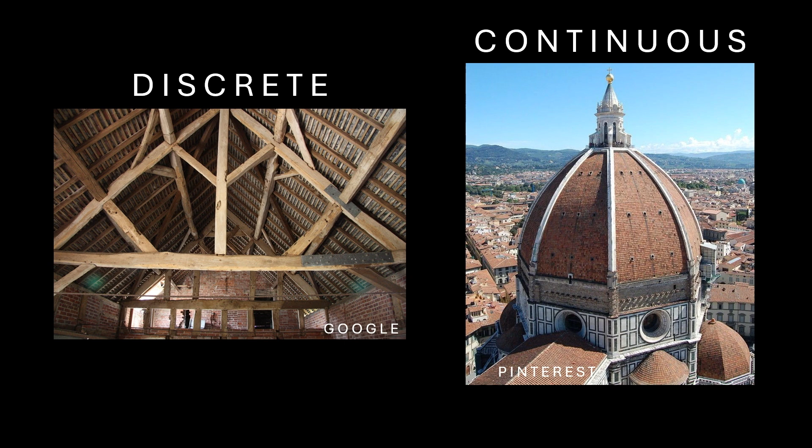Even terrestrial structures are built with material economy in mind, because material and labor is time and money. Over the centuries, 2 forms of architectural layout, structural form if you like, have emerged that make use of material economy.

On the left, we have discrete layouts: slender bars, beams, and rods connected at discrete joints to create these triangulated forms. But equally efficient, on the right, we have this continuous dome roof of the Santa Maria Cathedral in Florence.

So it's a surface, if you like, and if you take a few roof tiles off and poke through that surface, you'll find it's quite thin. So it is very efficient, and it operates like a shell from nature.

Engineers build structures that are safe by following these codified regulations of good practice. Now, for those in the audience that perhaps aren't familiar with the terms, engineering structures are made of elastic materials, so they stretch and compress under loading.

The resistance to that loading is met by the stiffness of the structure, a bit like a spring, and the stiffer the structure, the less it deflects, and so on. I should say that deflection, displacement, shape change, movement, distortion, these are all synonymous terms, if you like.

So the 3 criteria that engineers work to is that the stiffness, whilst bearing material economy in mind, should be such that the largest changes in shape are less than 0.3% of the size of the structure. The strength of the material from which it is made is not compromised, and everything that it does is predictable. It doesn't go unstable. It's giving us a response that is certain.

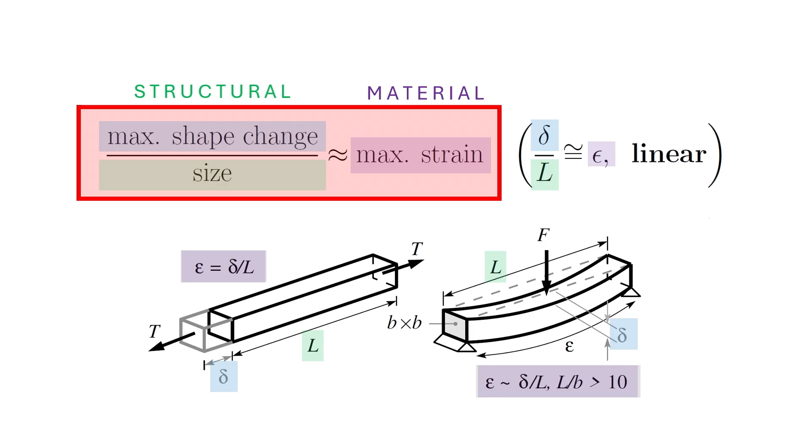But on the right there, the beam that's bending through a central point load deflects by an amount delta in the middle, but that divided by the span gives you a strain that's also delta over L, but indirectly through the assumption that the length to depth ratio, this L over B term, is greater than 10.

But nevertheless, engineers sometimes get this wrong, particularly when you have a sort of new architecture in play, and the Millennium Bridge opened in June 2000, and all rather publicly it had on show this sort of flaw in its design where the lateral, the side-to-side stiffness was too small.

It would wobble from left to right, and many thought this was a publicity stunt to garner media attention on the day. But really that wobble fed into the mindset of the people walking across the bridge. It literally synchronized their steps, and they all began to compensate together.

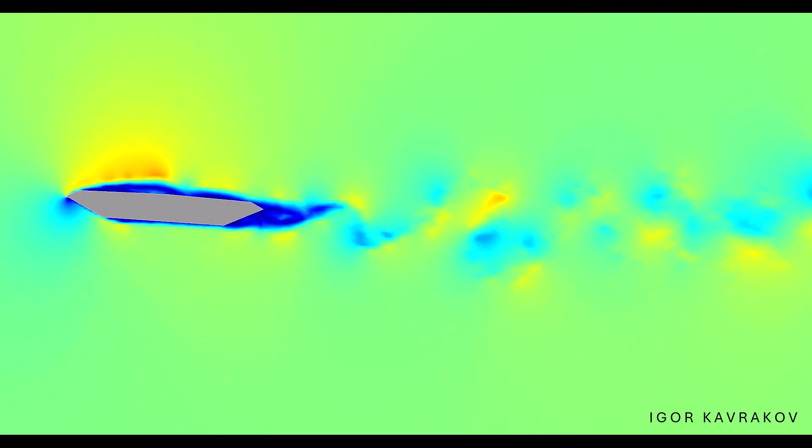This is a cross-section through the bridge, and there's a flow coming from left to right. The bridge is wobbling, we're not getting rid of it, and you'll see it generates this oscillation in the flow behind it. These vortices kind of spool off the bridge, pull the bridge down, they kick against it, and the bridge springs back.

But this introduces at the front, where the air is hitting it, this greater sort of disturbance. You'll see the orange flow, if you like, then beginning to feed into the vortices at the back, making them bigger, making the kick larger, and then suddenly this begins to run away, and it's sort of end of days for the bridge shortly after that.

So structures change shape. They move. We build them to be relatively lightweight. We accept that they move. We try to contain that movement. But I've made a career in research terms out of making structures deliberately change shape, what we call shape-changing structures.

I've got to be careful here about expressing loyalties because my civil engineering boss is in the audience, but my first love is really aerospace structures, the structural mechanics, if you like, of aircraft, spacecraft, satellites, that sort of thing.

So I used to go to conferences where the great and the good would stand up saying, if we're going to build these aircraft of tomorrow, we have to have structural mechanics that allows the shape of the wing to mimic what you see a bird doing in biology, where the wing will change shape to adapt to the aerodynamic flow. So it can sprint, for example, quickly to a scene of interest, or it comes into land on a much shorter runway than expected.

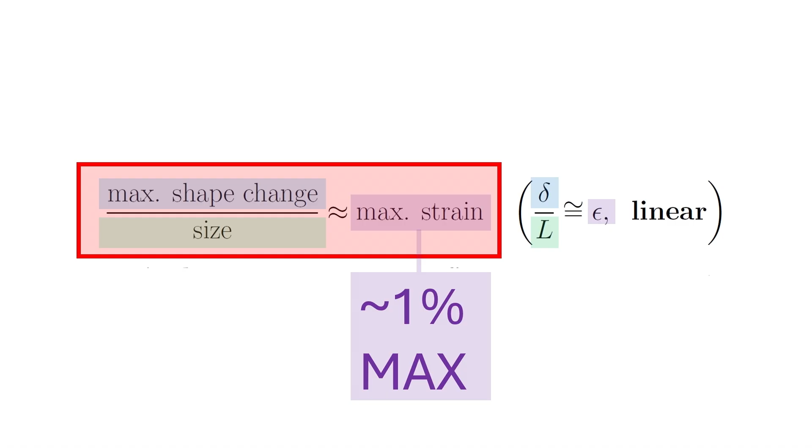But I'll remind you that if we even allow engineering materials to have a little bit more strain, you're not getting close to the limits of ostensible shape change that will allow that. But if you look around you, there are examples of shape-changing structures there.

And that enables it to be folded with many others, so you can launch them into space at the same time. And then they gather themselves into a little swarm and spin around the Earth once they've deployed, beaming solar energy back to the Earth.

This is a project led by Sergio Pellegrino at Caltech. He was formerly here in Cambridge and my PhD supervisor. In the mid to late 90s, during my PhD, I worked on a primitive form of this self-deploying technology.

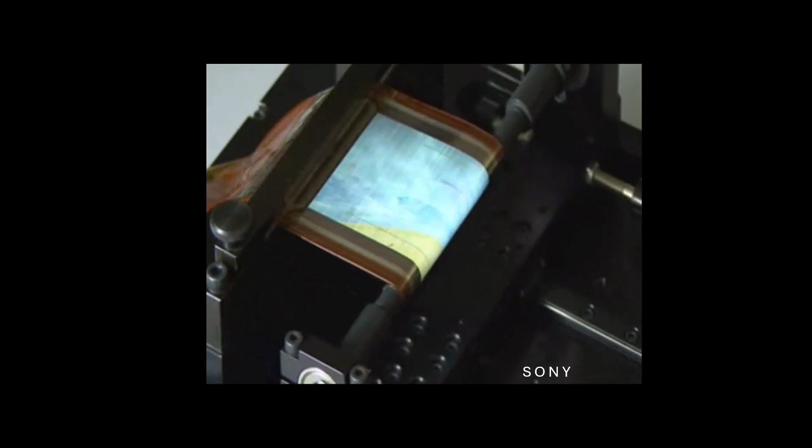Sony, in marketing the flexibility of their OLED display some years ago, were keen to show that it was so flexible you could roll it around this motorized tube.

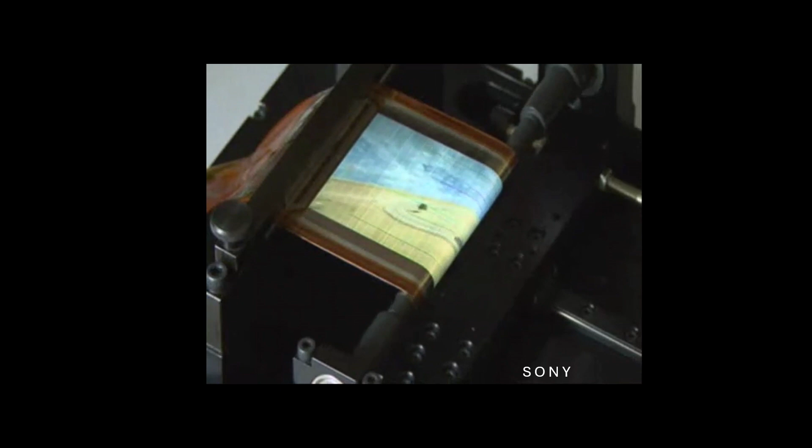But if you look around you, there's technology in the home that can be deployable. Deployable because you want to store it in a folded, compact way, but you have to open it, and in opening it, you latch it, you lock it to give it some kind of structural integrity.

So I'm entering the last phase of my academic career, and I thought, well, perhaps I have enough experience and wisdom to put this stuff down on paper in terms of writing a textbook. It's a book literally of two halves: the geometry and mechanics of the possibilities of shape change versus what you need by way of structural mechanics to make that happen.

And I'm going to talk about some of these principles now with a little bit of demonstration.

I think it's important that we write textbooks. We've lost, if you like, that ritual and custom, I think, because of the way in which research has become commercialized. Maybe I'm platforming slightly, but I think it's incumbent upon us to educate the next generation, and to do that, you should be writing textbooks. I'm aiming that message at any mid-career academics in the audience.

So let's talk about compliance. Now, compliance literally means you've got something which is already flexible. What can you do by way of shaping that? In this case, I'm going to talk about surfaces and the shaping of surfaces via generators.

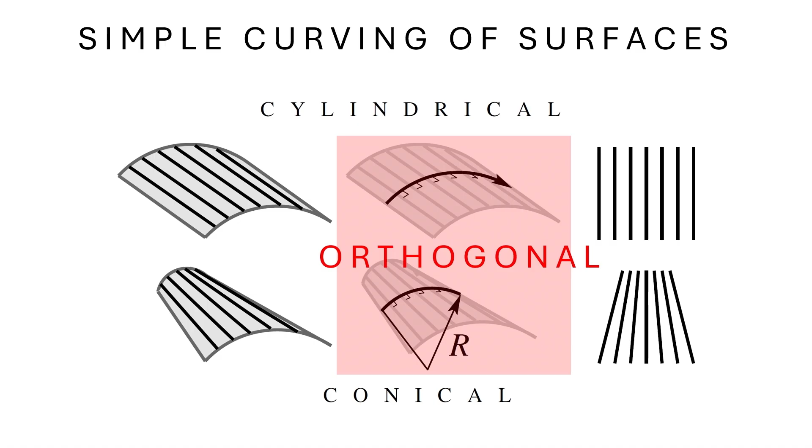The trusty engineer's piece of cardboard clearly tells you you've got a flexible surface here. What I mean is that if you have a surface which can be curved, you can either curve it about a cylinder or curve it about something which tapers like a cone, to create these surfaces upon which you can draw straight lines. Those straight lines run at right angles to the direction of curving. Because you can draw these straight lines, you've got what's called simple curvature, or simply curved surfaces.

James Clerk Maxwell suggested the projection of those lines onto the plane of a page in order to generate an impression of the surface, which is why these lines are called generators.

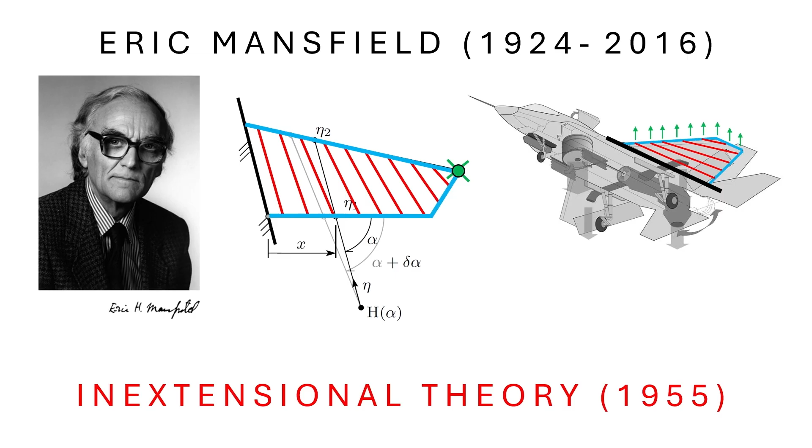Eric Mansfield, working at the Royal Aircraft Establishment for 30-odd years, took it a step further and said that out of the infinitely many generators you can draw on the surface of the thin wing of a fast jet, only one of them will exactly satisfy the work balance of the aerodynamic forces causing that curving out of plane to the energy stored within the bent wing - what he calls an inextensional theory, inextensional because the material is curving, it's not stretching.

But an effect that is perhaps felt up and down the country most weekends with regard to the flexibility of surfaces is what I call the pizza effect. The pizza is like a thin surface that droops, and you can draw some straight line generators on this. But we all know that with pizza, if you curve the base, you can straighten the pizza.

So then you can eat the pizza with a little bit more dignity. Here's a little demo with something a bit more handleable in terms of size. The generators are orienting themselves at right angles to this radius of curving that you see there. So that was the demo.

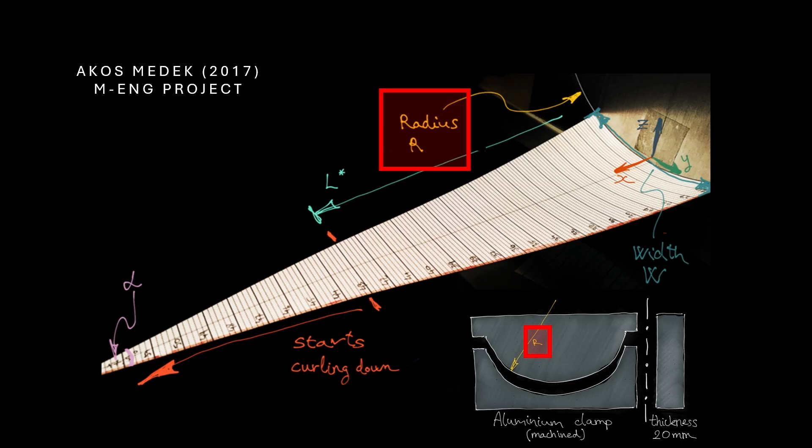We did a project with an undergraduate, Akos Medek, where we tried to understand the relationship between the triangularity of the slice and the radius of curving at the base. No matter what you did, you always got the end of the pizza drooping a little bit when you do this properly. You can see this here when I kick it out and let it go a bit - the front droops a little, but this is a property in proper experiments.

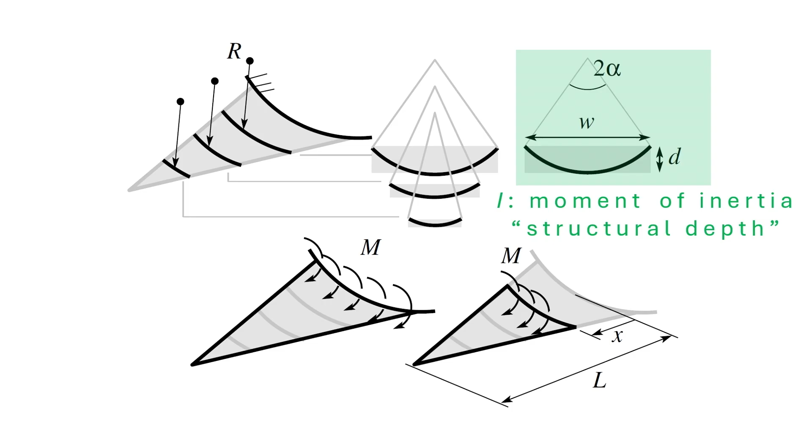Now the reason for that is if you assume your pizza is simply curved, then every cross-section moving towards the tip is a circular arc of diminishing width and depth. That depth provides the moment of inertia to create structural depth, which helps you carry the leveraged weight ahead of that cross-section, which generates this reactive torque, which we call a bending moment, M. It too diminishes as well.

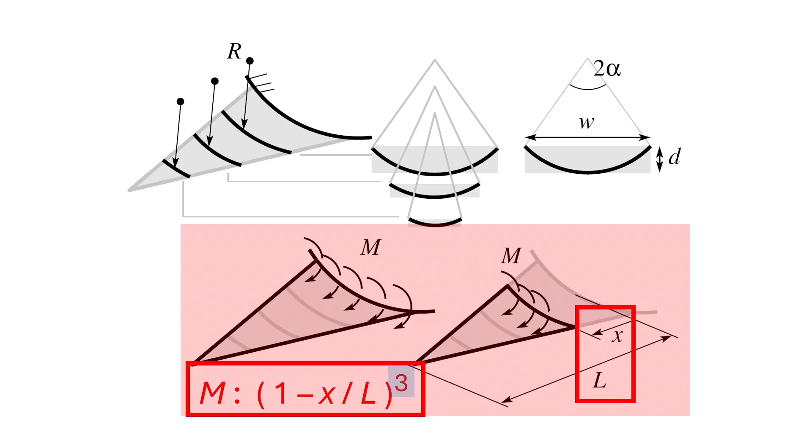So there's a lot to take in there. But the point is, if you plot those variations normalized between the base at 0 and 1 at the tip, you see that I sort of goes off at a faster rate and almost disappears two-thirds of the way along. If you plot the ratio of M to I - what you need to carry relative to what's available by way of structural depth - you'll see it blows up again towards the end, two-thirds of the way along, which is kind of what we're seeing. So if your structure isn't able to furnish that demand, you'll see it dip at the front there. Okay, so that's compliance.

I'm going to talk about mechanism here with the tagline, articulating catastrophe. These are scissoring units where you have bars, pairs of bars connected in the middle and to each other, so that when you articulate them they go in this sort of linear motion - we're kind of familiar with this. This allows you to change the position between, say, a mirror and a receiver on a satellite, or to reach inaccessible heights using these scissor lifts.

Sergio Pellegrino, again at Caltech, recognized - and this is the catastrophe part - that these structures aren't really structures, they have no stiffness, they're quite floppy. But if you were to weave cables through the structure, you can arrange for those cables to become exactly straight as you deploy it. So the tension in the cable acts to provide stiffness, if you like, by proxy.

If you move the position of the central pin so it's no longer central, like we have here, and articulate it, it goes in a curved path, as you can see - a more tightly arranged curved path. That's quite useful, but a better arrangement is to use a scissoring pair connected in the middle, but with a kink. The kink creates a divergence between the outside pins, and rather unusually, that angle remains fixed irrespective of the articulation angle.

So you get these little units sliding up and down these triangular channels. And if that channel is exactly one whole fraction of 360 degrees, you can connect them to form a ring, and so you produce something which is a little bit more useful.

If I switch to the screen, can I just switch to the overhead here? I didn't see it on screen there. So just to show that.

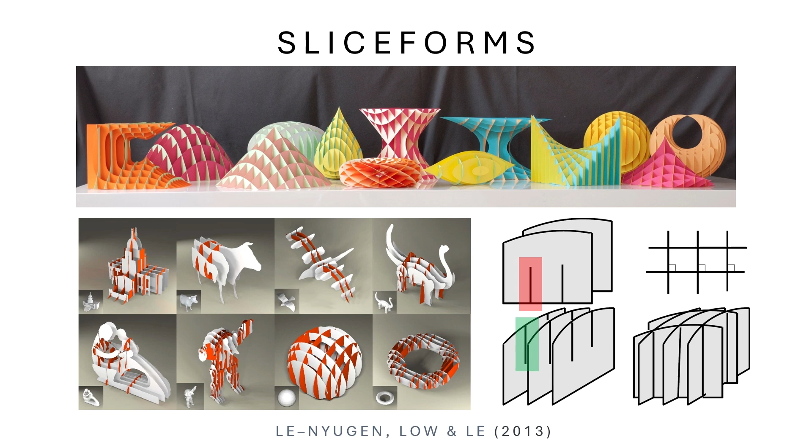I'm going to digress slightly and talk about this arts and crafts pursuit entitled slice forms. This is where you create volumetric shapes by taking slices through the original volume at right angles to each other. This creates slices with a profile on the outside, and with the complementary slots, you can reform them to produce a discrete version of the original volume. This is why they're called slice forms.

You don't have to have slices that are vertical or at right angles to each other. In this rendition of a torus, where the slices pass through the center, it generates a circular profile in the slices, known as a Villarceau circle, named for the French geometer who discovered it.

So I have one here, and you can see it's quite a lightweight structure. It's got a lot of air, it's made of card, and it's quite stiff. We were interested in their structural mechanics, their load-bearing capability.

It's this almost three-dimensional volumetric version of a pantograph, with scissoring planes and hinge lines. What's beautiful is that they fold into a flat stack. They can be opened as far as the design configuration allows. This one is deliberately helical, so the ends never meet, but it locks out - you can't move it past this final lockout position without some jamming taking place in the structure.

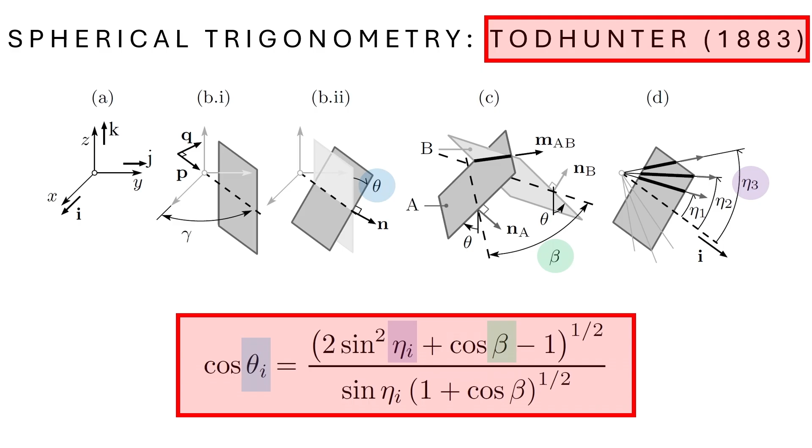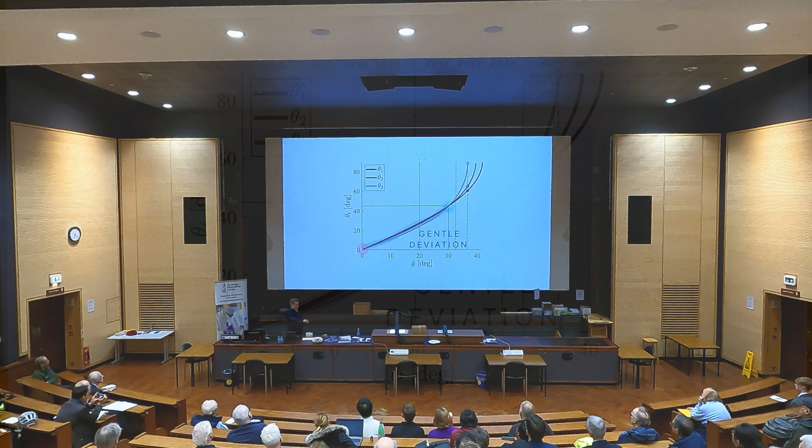relative to the opening angle beta, depends on where the radial slot is - this eta term you're seeing here. So theta, as you move along the slice, and the white dots mark different slot positions, will vary. When you plot that variation against the opening angle, you find that in the flat folded configuration and the open configuration they're exactly the same, but they gently deviate in between - meaning that as you open these, the slices individually are gently rotating within themselves.

They're flexing and curving ever so slightly, and when you get past the design configuration into the lockout phase, you can see the angles ramp up exponentially. It begins to jam, which explains what's going on.

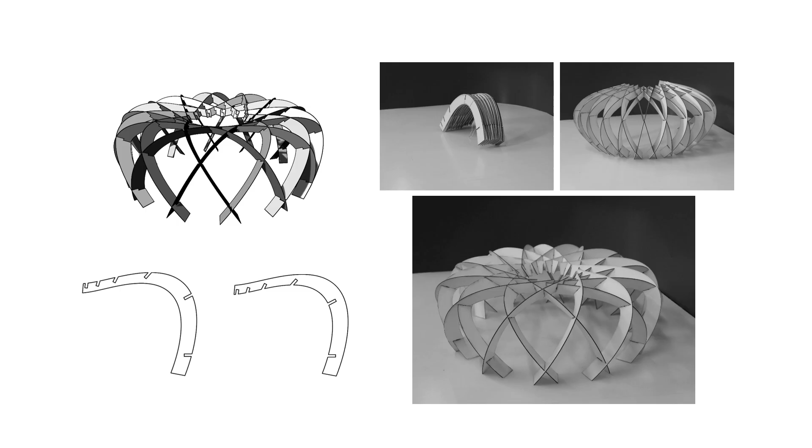Not to diss software - you can use it to do interesting things like create slivers instead of slices, arranging birdcage-like forms, and even an asymmetrical, artist's interpretation of the Beijing Stadium.

But that's the end of that, and now we're going to move on to folding, which involves forming vertices out of plane.

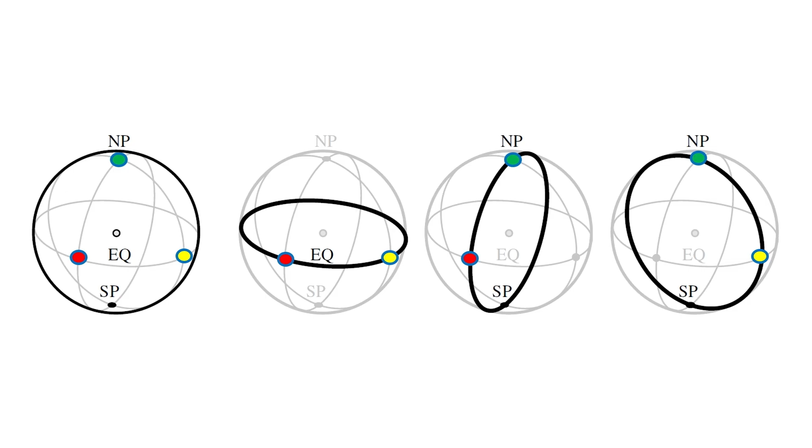Hold that thought. Here's a sphere with some circles drawn on the surface. These are great circles because they have the same center point as the sphere. We have an equatorial or an equator circle. And then we have two polar circles on the right, separated from each other by 90 degrees. That allows us to identify 3 points in the circle where pairs of points are common to pairs of circles.

And if we then go on a journey, if we walk from the North Pole to the equator and get to that point at the red, and then proceed to the yellow, we have to turn through 90 degrees, and we get to the yellow to get back to the North Pole, we have to turn through 90 degrees as well. So we create a three-sided object on a sphere, a spherical triangle, where clearly the internal angles in this case are 90 degrees.

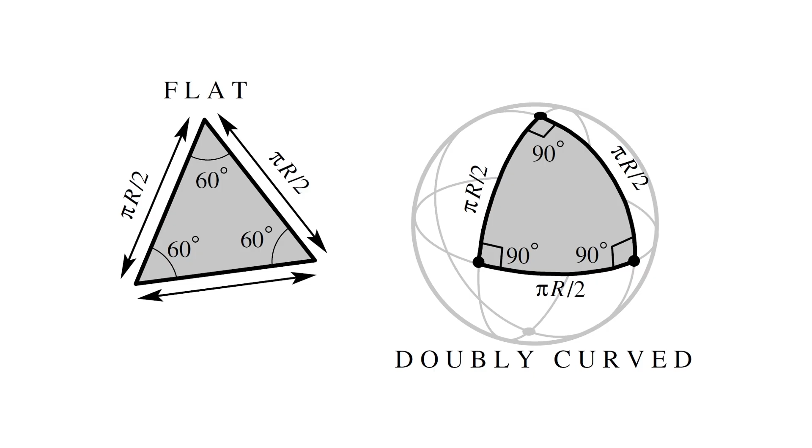And so if you take a flat surface, a flat triangle here, and the side lengths being pi over 2 are coincidental because it can exactly fit onto the surface along its edges, but everywhere else, with respect to what's happening in the corners, you will see the corners have to expand from 60 to 90 degrees. The material has to stretch, and that stretching is a consequence of the fact that you're forcing something flat to become doubly curved, and that was all due to Carl Friedrich Gauss's remarkable theorem.

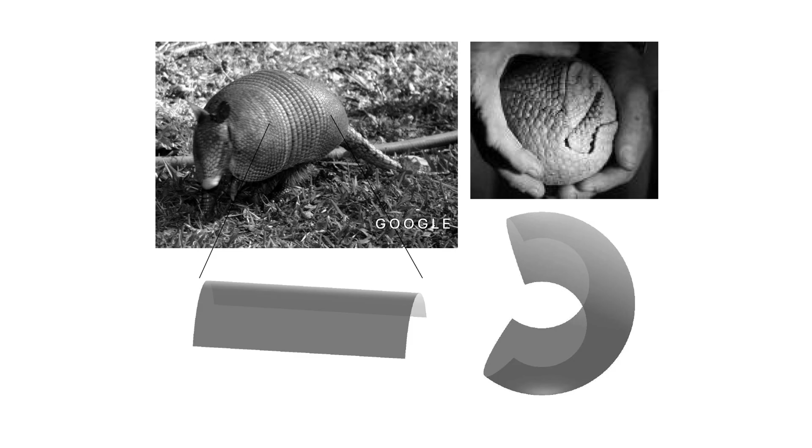But the armadillo is a friend of Gauss because it has this semi-cylindrical sort of midriff. It's got this armored body, and this midriff allows it to be articulated into a ball. So it goes from being simply curved in the middle to something which is doubly curved, so it must respect Gauss's theorem as well. This is a schematic of what happens. It's got more or less a sort of fixed front and rear, and this flexible middle.

Well, the sort of central portion comprises these pleats, these ridges for sort of armor protection, but the pleats can open and close. And even in this simple rendition here, where I force the center of the pleats to lengthen and to shorten at the edges, you can see already the impression of a spherical surface on the right side emerging.

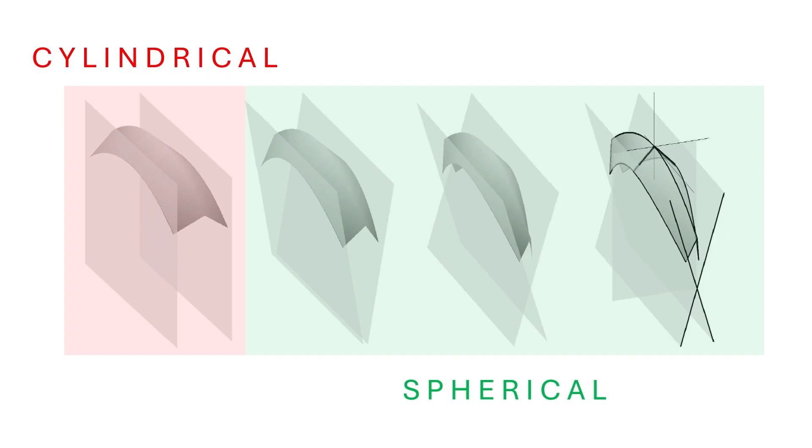If you take a single pleat and imagine it in its cylindrical configuration sitting between two parallel planes, and then you rotate those planes to create the sort of spherical journey, then moving from the opening in the middle to the outside, closing, you get the material. The material has to stretch. There has to be some compliance of the material to match that articulation, which kind of lends this then to a sort of family of structures that we call compliant shell mechanisms.

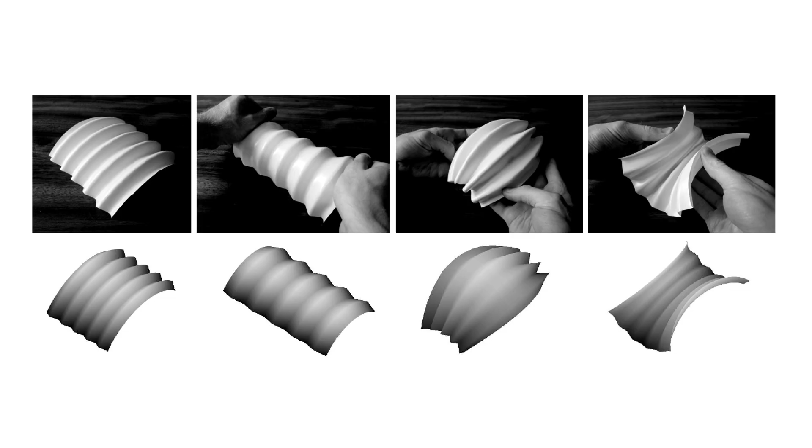And so you can propose some simple demonstrations of this. You can compare then against simulations, and you can simulate then the folding of an armadillo if you so wish. This is important, this relationship between double curving and the material stretching, because if you don't take account of that during engineering design, then things like your tubular Hoover hose becoming doubly curved will experience stretching that might be unwanted by the material and thus lead it to failing prematurely. You also see this principle in things like bendy straws.

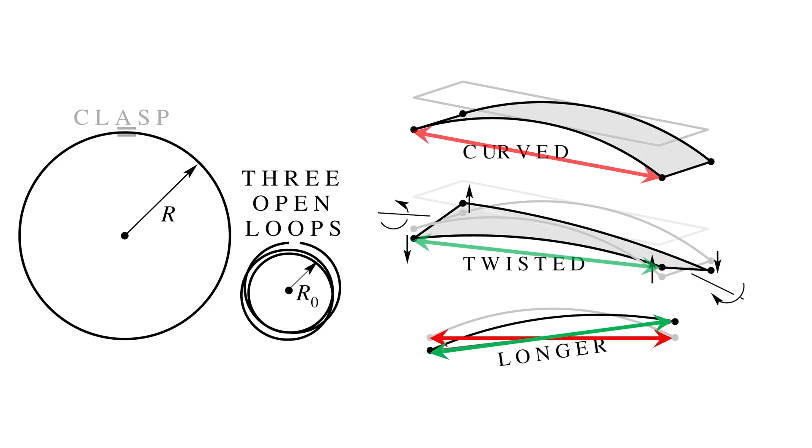And I've got an example here of a hoop, not a very circular hoop that you can see. There's a clasp at the top here where my hand is to keep the loop open. If I remove that clasp, it collapses into three smaller loops that you can see there. Here, the buckling interchange or transition is not between curving and compression, but rather between curving and twisting. Because if you look at that little curved strip there and the difference in the length of the red and green lines, if you twist something which is already curved, you gently uncurve it whilst adding some twisting to that. So there's an interplay there, and if twisting wins, then it follows that path.

So I'm going to shake this, and you see it's quite impervious to any sort of movement. I'm doing this all in plane, but if I twist my hand, then after a point, it jumps into three loops, and that's very, very nice indeed. I'm working with the great Basile Audoly in Paris. We took it a step further, where if I formalize what I've done there, I'm twisting this in a singly directed fluid movement. I can create the same sort of thing.

But if I introduce some variation into that twisting movement, which is to say I kind of turn my hands one way or go the other way, I allow that to take place, then I can create five loops, okay? And if you know what you're doing, you can make seven, okay? But it's not very stable. Well, it might jump up and give us something to laugh about in a moment.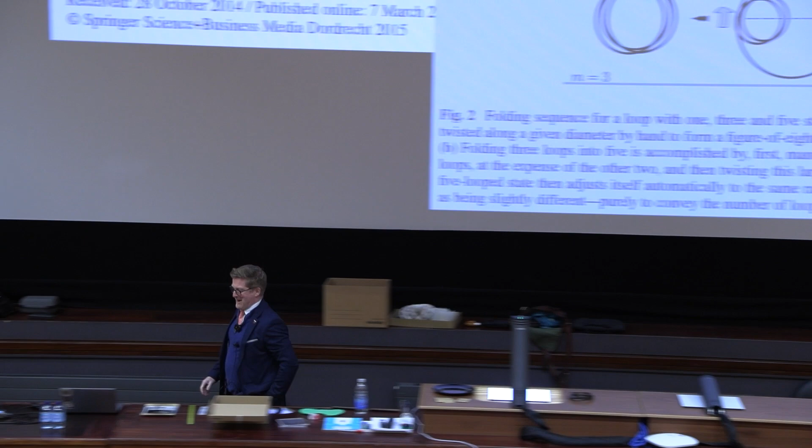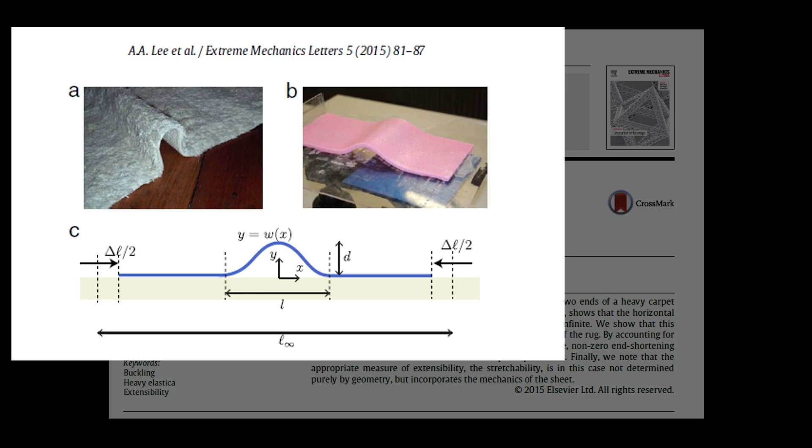But anyway, Dominic Vella's group at Oxford looks at buckling in a slightly different way. They talk about this problem, the birth of a ruck in a rug, which is to say you have an Euler beam lying on a surface, and instead of the whole thing buckling sideways, you get this localized hump in the middle. This is what they call the ruck. And you see a ruck also forming when this ring of cells, the epithelium, spontaneously folds.

The epithelium folds inside to create this internal structure that repeats along the length of the developing embryo to set the body plan for things like the digestive system and so on, in a process known as gastrulation. It's a buckling process because what's happening is that the ring of cells wants to be larger. They're proliferating, they're getting much bigger, but it's contained within the shell.

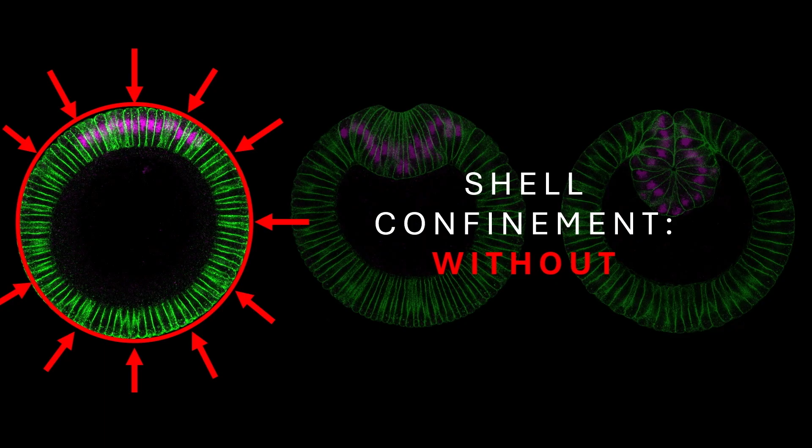So this is the formation of a ruck through buckling. We call it ruckling. It's happening within a cylinder, within a ring, so we call it cylindrical ruckling. And it's important to note that that ruck just doesn't grow from nothing. It appears at a finite angle here, and we call that angle 2 theta min. And the corresponding growth strain at which that takes place, you can imagine to be the excess angle above 360 if you were to cut that ring and it was just to grow and overlap instead.

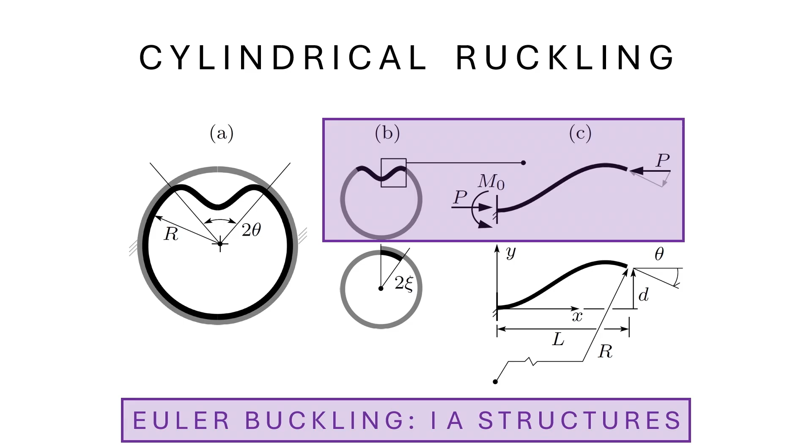So I looked at this problem as a mechanics problem that we can solve with the techniques that we teach our first-year engineering students. So we don't use calculus of variations. We solve for the equilibrium of that. We think about how that sits within the shell in terms of the geometry. And when you solve for the instance of ruckling, you get two formulas that are largely constants, except for this K term. This K measures the thickness of the ring to the radius of the ring that's deforming. And you'll see they differ in terms of the power to which they are raised.

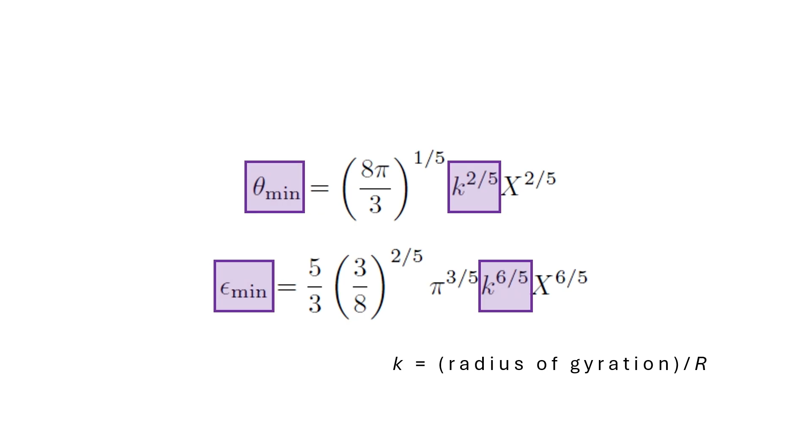And this is important because developmental biology groups around the world attempt to calculate these angles. They measure it from experiments. They measure the height at the moment of inception of the ruck itself. And the reason for doing that is so you can find the level of growth strain that's taken place there as well. And so they plot lots of different results from different experiments. They do simulations using software.

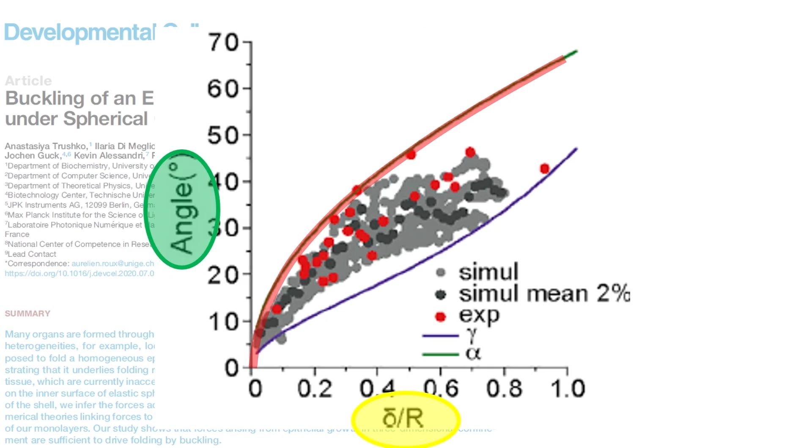And the red line that you see there is a calculus of variations model that contains a Lagrangian multiplier to account for the shell-containing constraint. It uses a hyperelastic biological material with large strains and large displacements enabled. And it's got a bifurcation algorithm to capture the buckling instance. So that's all very well and nice. If you plot my results, you follow that red line almost perfectly. So we have a mechanically transparent way of doing things. And the reason it works is because the process is remarkably simple, because that's kind of what biology does. It finds the simplest way to do things.

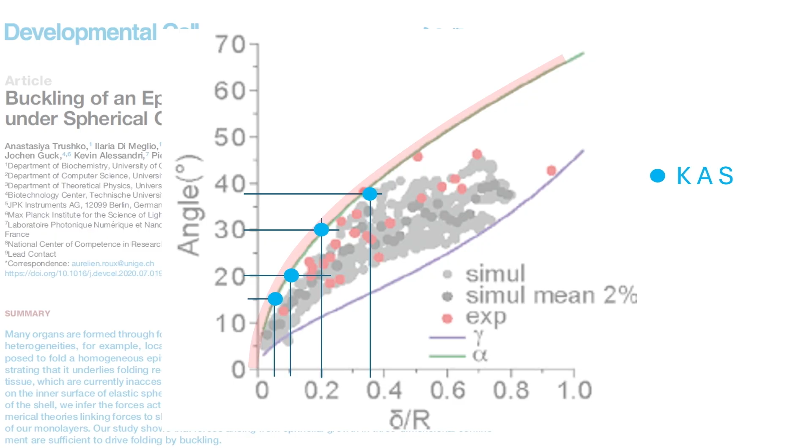William Shakespeare, 110 years before Euler was born, wrote, "And as the wretch whose fever-weakened joints, like strengthless hinges, buckle under life," a metaphor for the midlife man, perhaps. But William Shakespeare was not a civil engineer. But you can see the proliferation of technical terms here that we now use within the vernacular for describing our subject: hinges, strengthless, buckle, and joints. I think that's all rather lovely, to assert that kind of cultural relevance.

Buckling is derived from the French boucler, which means to bulge, which is derived from the Latin for cheek, where we get terms like buccal fat from. But I think, if our cheeks are bulging, we shouldn't be lamenting the failure of our structures through buckling. We should be smiling, not celebrating the failure, but celebrating the fact that buckling features right at the heart of life itself.

Okay, so the next principle is non-linearity, going beyond shallow. What I have here is a thought experiment. I've got two rods that are connected to each other by pin joints. They start off being length L each. They sit a little rise H above the horizontal, and the center point is pushed vertically, so they compress.

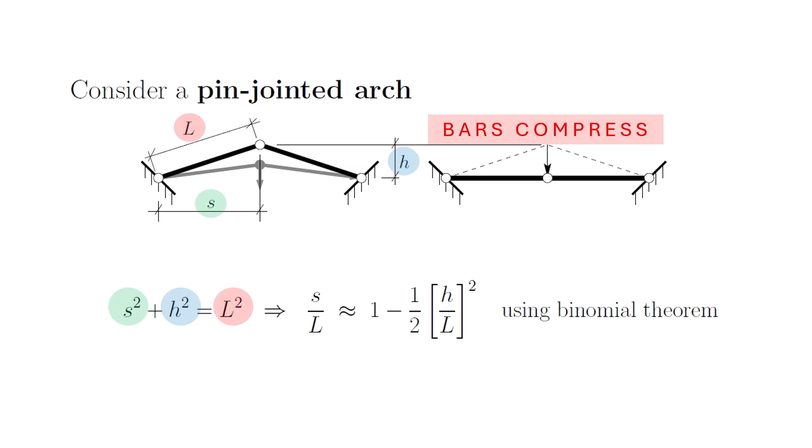So the S is shorter than the L, and you can write a little bit of Pythagoras. You can truncate that series using the binomial theorem. You can calculate the strain, and you find that that strain varies as H over L to the power of 2. It is not linearly proportional, but non-linearly proportional.

If you set the limit of strain, say, equal to what you see in engineering materials, around 0.2%, then the allowable H relative to L that permits that to take place so that you don't exceed the strain is about 6.3%. Compared to the linear result, that's a 30-fold increase.

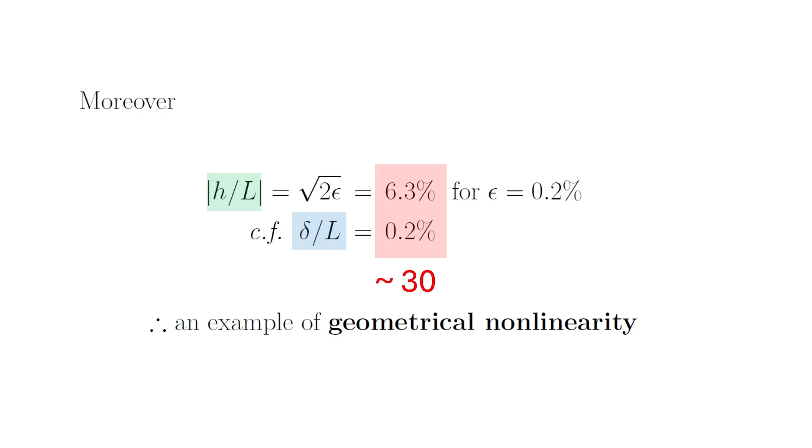So this is what we call an example of geometrical non-linearity. You're creating a large movement, but you're not creating excessive straining at the same time. And furthermore, if you push that arrangement inside out, because the bars naturally grow in length again, they relieve themselves of that compressive strain.

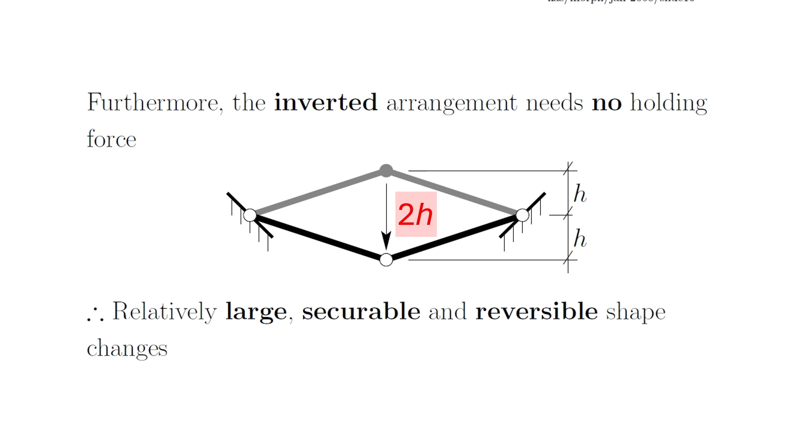You create something that can be inverted. You get this second shape, and you get a very large movement at the heart of it. And this is a little demo to illustrate that. I'm pointing at some springs on the left and right side. Oh, it does work, the sound.

You saw that, you see the center moves through quite a bit of distance, but again, look at the movement in the springs. The springs are hardly compressing, to signify that there's very little material strain going on there relative to the movement of the center. And it's invertible. It's happy to lie there.

Here is, that might be a bit loud, here is the continuous incarnation of this, which is half a tennis ball, and you can turn half a tennis ball inside out. You can invert it as well, and it's happy to be in that configuration. Plop. And it won't revert.

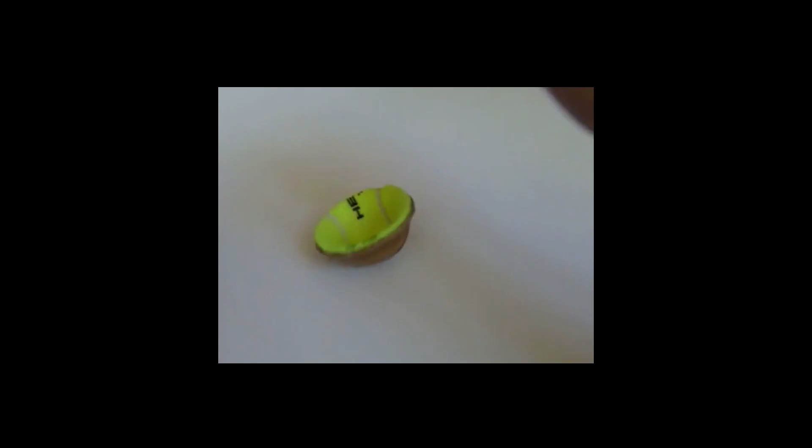And that, to me, is an interesting sort of problem to try and solve from a mechanics perspective. But we're reminded that Gauss tells us that if you start off with something which is flat that becomes doubly curved, you might expect there to be some in-plane straining and some out-of-plane curving taking place.

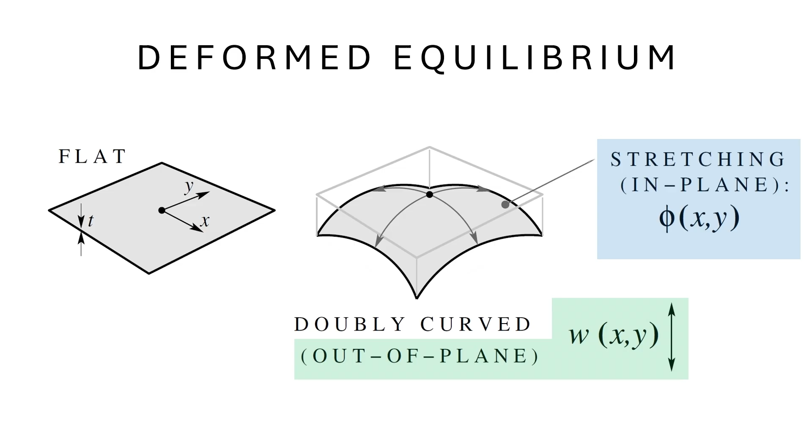If you go inside the surface and look at what the forces and moments and in-plane torques are, basically all of the mechanical stuff inside, if you look at the rates of change of what's happening, and then sum that up and bring everything into resolution, you find that you get this deformed equilibrium equation, a differential equation, which also has to be solved. So you've got to solve these two fourth-order nonlinear partial differential equations together in order to describe problems like the tennis ball turning inside out, and you can.

So we imagine we start off with a spherical cap. It has some radius of curving, r0. You turn it upside down or you invert it, you push it through, it acquires a new radius of curving, r. Kappa is the Greek term that we often use to denote curvature, which is the reciprocal of the radius of curving, so a high curvature means a low radius and vice versa.

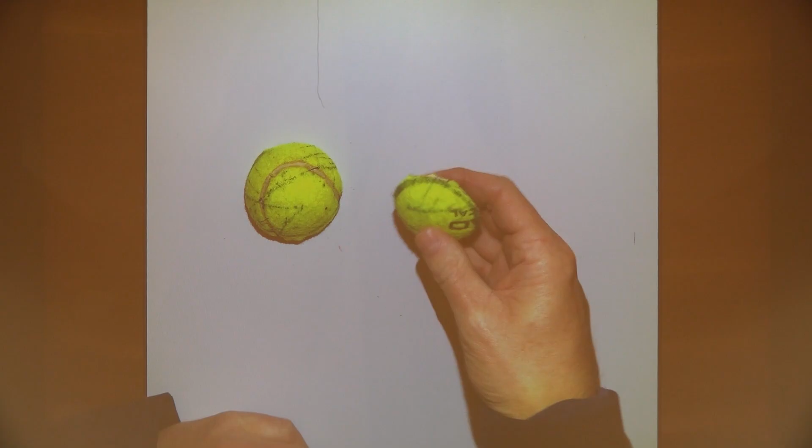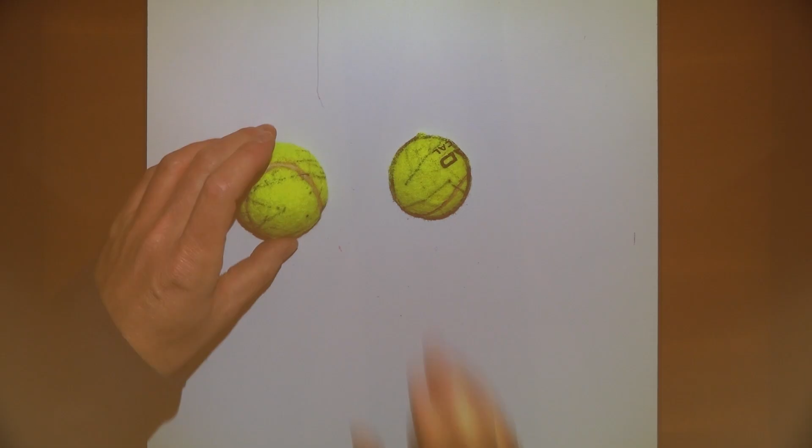I've got a pair of butchered tennis ball parts. You can see here, there they are. The one on the left or right is insufficiently wide, I can't make that stay inverted no matter how hard I try. This one is a little bit wider, it sort of supersedes the threshold, and it's quite happy to be inverted, and it can revert as well. So that kind of shows that this sort of method has some kind of credibility.

So you've got an initial shape that has no loads applied. You have a second shape that's invertible. It, however, is not stress-free in the case of the tennis ball, because it starts off as a doubly curved shape and then becomes another doubly curved shape.

So you don't mitigate the stress entirely; some of it remains. But nevertheless, you create a state of internal equilibrium with itself, even though no loads have to be applied. And the existence of these two states means you have a bistable structure.

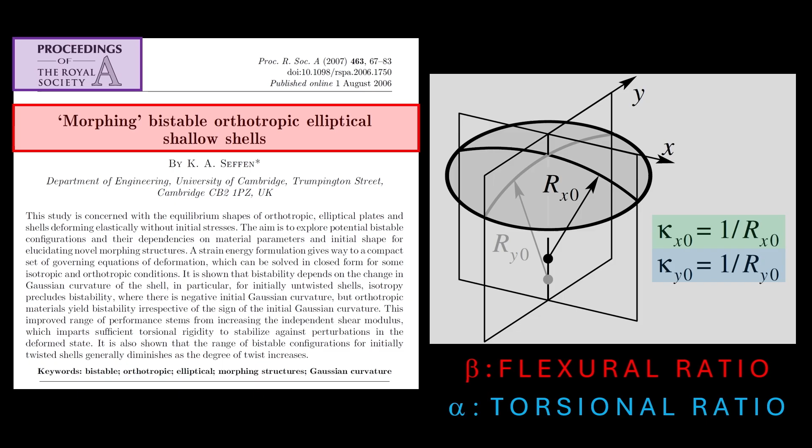So what you do then is amplify the level of parameterization. You allow these caps to be curved differently in two directions. You might add a little bit of twist, and you might use materials that are not isotropic, but have properties that differ in orthogonal directions.

And you plot the degree of stability as a function of the initial shape. So you create these regimes, these landscapes where every point is a starting configuration. The light gray tells you where to expect bistable behavior. The white is monostable, and the boundary between gray and white is a bit like the threshold we saw before. But the difference between these is in the Poisson ratio, if you know what that means.

And the landscape on the right has these extra darkened regions which indicate three stable configurations—tri-stable behavior. This was discovered by my good colleagues on the continent, Stefano Vidoli and Corrado Maurini, who really took this to task and widened those regions of feasibility by working with particular material parameters that we don't need to go into here, showing that these things were absolutely possible.

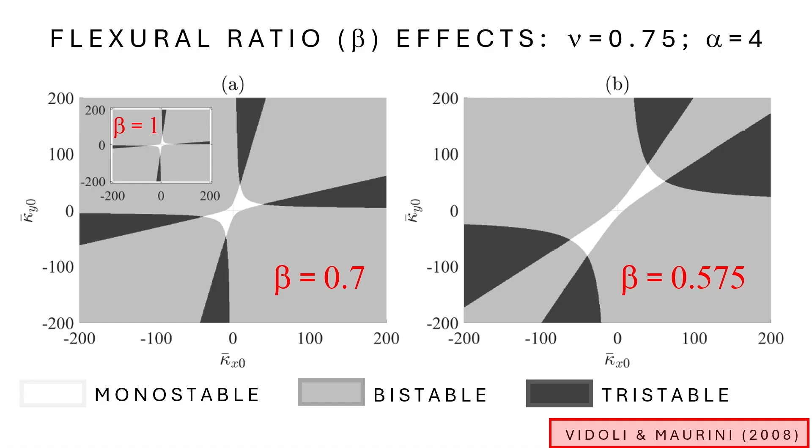So if you want to create simply shaped shells, then they are multi-stable if you work with materials that are orthotropic, not isotropic, that have a high torsional stiffness—this also came out of that study—and they have a high Poisson ratio.

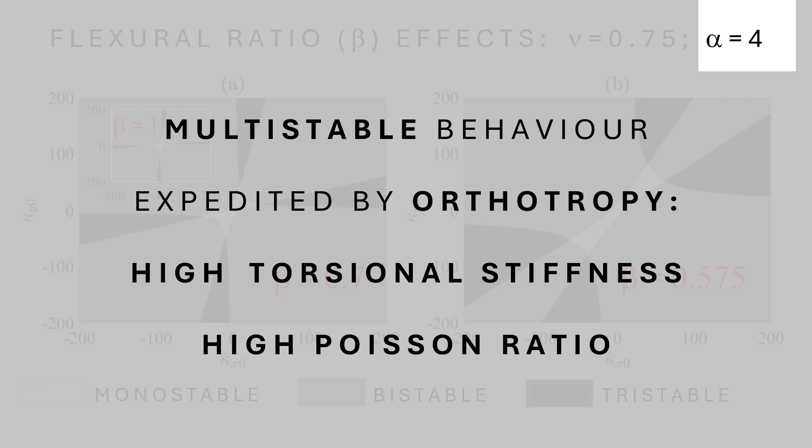This segues nicely into the role that constitutive material behavior has upon multi-stability. You've all heard of carbon fiber, glass fiber reinforced plastics—these are what we call laminated composites. Essentially, you have layers or laminates with fibers running through them that give you strength in two directions, different levels if you like, sat within a matrix, a different material. By varying the relative orientation of fibers, the number of layers and so forth, you can begin to tailor the material you need to create something like this bistable tube.

So it's a cylindrical tube, as you can see. It's got this bistable configuration, but I think I should let my colleague Simon Guest demonstrate the bistability. Let's see that again.

So this is a bistable tube, and Simon runs the lab with me where we make these sorts of things. Don't tell health and safety. Anyway, so you don't need access to fancy composites.

You can work with this structural architecture, which is a grid shell, and the grid shell is simply that—a surface that looks like a grid. You've removed material, and in removing the material, you lower the bending stiffness. You make it more flexible in bending, but you keep the torsional stiffness, so you're elevating the torsional stiffness in comparison.

Okay, so the next principle is activation, which has the tagline inelasticity, residual strains, and I'll explain what we mean by that in due course.

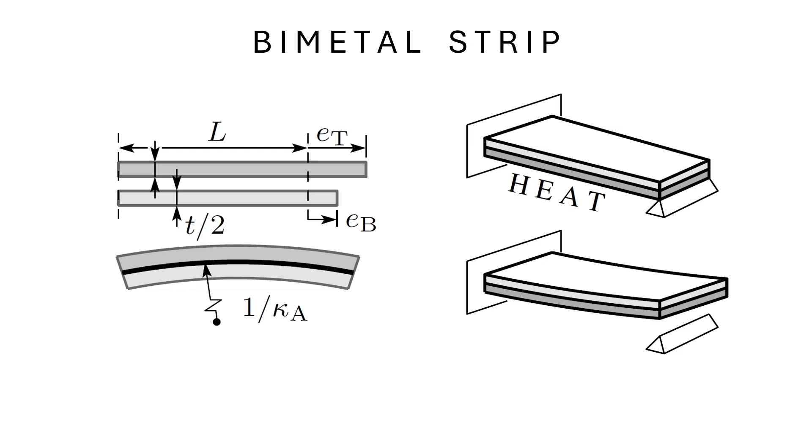The more familiar example of this is where you take a metal and heat it, and two different metals heated by the same amount will expand by different amounts. But if you connect them together, they will curve to accommodate that differential expansion, and that is known as the bimetallic strip.

The bimetal strip, because it's conductive, often features in electrical heating circuits where the electricity itself has been used to heat something, but that heat gets diverted onto the strip at a particular point in order to cause it to curve upwards, break the contact, and stop the heating. This is the principle that stops your kettle from boiling dry.

But another little example here, a sort of frivolous example. What I have here is a little cap, and you can hear it sort of click through. It's a bit like that smaller tennis ball cap. It's got a single configuration. It doesn't want to be bistable.

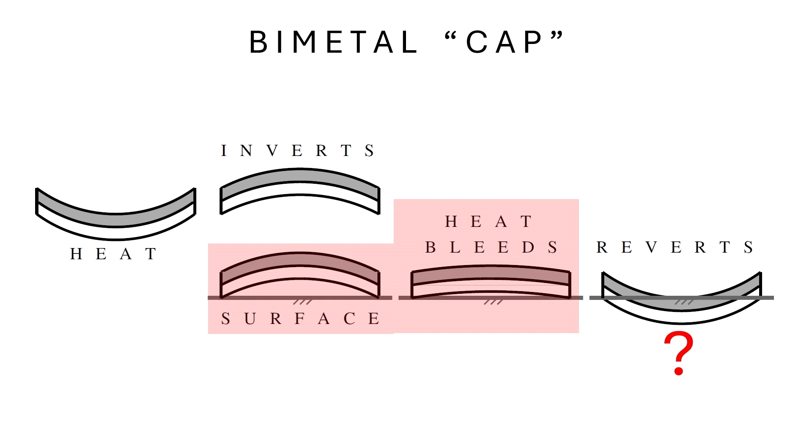As this picture shows, if I rub it with my thumb, I'm creating an activation curvature that puts it in the direction of that second shape. You can see as the heat bleeds from it, it releases that second configuration. That's a dynamic snap back, and that manifests at the particular jump that you saw there.

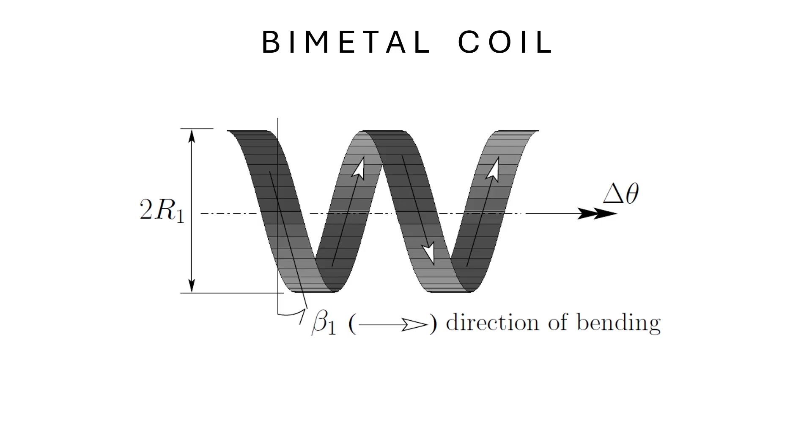Now, I was interested in getting a little bit more out of bimetal because it is a quite small strain. So how do you maximize or magnify that? What you do is you coil your strip into a helix, so you get a lot of length in a small volume. This is what it looks like before you heat it.

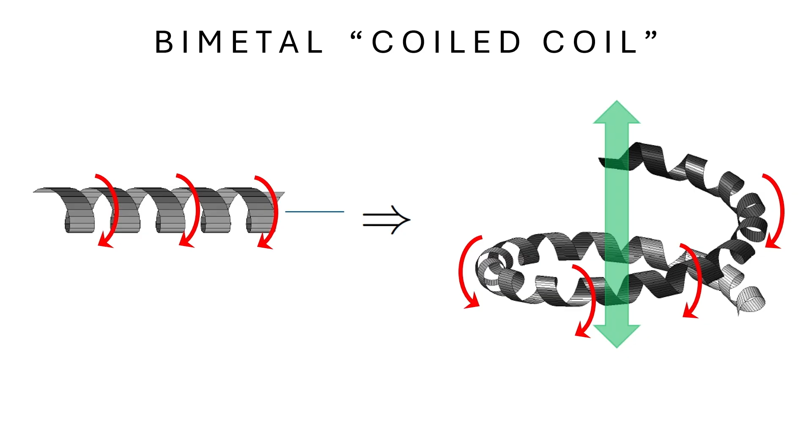I became interested in this project because I did some work for a really good man here in Cambridge, Tony Hooley, who proposed these kinds of coils as a way of driving motion in electromechanical devices. The University of Birmingham solved the problem of how to make them out of ceramic, because piezoelectric material is a ceramic, and they are electrically driven.

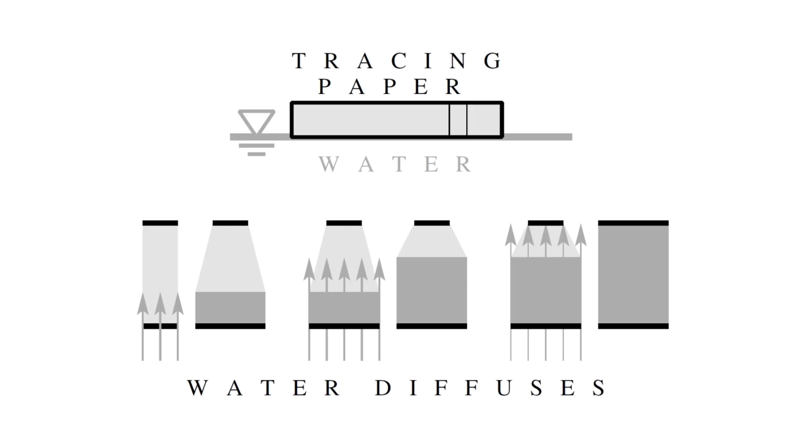If we don't have access to piezoelectric and bimetal, you can generate the same sort of effect using tracing paper. Tracing paper, when it sits on top of water, swells, generating a differential expansion, and that results in some kind of curving.

So I'm going to try and illustrate this using a plate just as background and some water, just so that you're convinced it's not special water. There we are, some water on the surface there.

Now, this particular type of tracing paper has, where the arrow is indicated, a preference for swelling - it will swell in that direction along the length of the paper. So that's where the rolling will take place. I have some prearranged strips that I've cut here, and if I put these on the surface, you'll see after a time it starts to curl along its length. So it's doing what it should be doing.

If you have some strips cut at right angles to the length, like this one, then you should expect to see it roll across. And it does.

And then finally, if you have some strips that are cut at an angle to the length, then it will helically coil, as you can see here, and do something rather lovely. Let's put a few on there for the sake of theatrical performance. There we go. And yes, so this is the exact same effect. There they go, coiling away.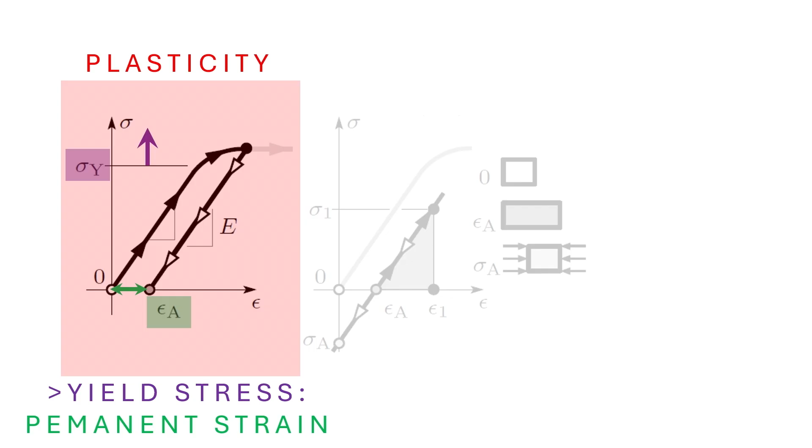But this allows you to do interesting things like make a flick bracelet, and I'm going to just move this out of the way. And a flick bracelet is, you might be familiar with this. Well, first of all, I've got just a piece of sort of tape measure here. And we all know that when you bend a tape measure, it sort of wants to be straight. I'm going to leave that there because we're going to come back to it in due course.

And what I have here is a pre-prepared sort of piece of tape measure. Okay, so there it is here. If I take this tape measure and I kind of coil it around the top here and pull through, then I've imparted a sense of that sort of coiling permanently. It's sort of built the shape into it. But because it's a tape measure, because it has some sort of curving this way, a bit like the pizza, that gives it structural depth that prevents that shape from being realized until such times you kind of lose the structural depth. Off it goes into this bistable configuration.

So what you have is this sort of thing kids call a flick bracelet. There we go. It sort of wraps around, and that's very nice indeed. So what you're doing there is using the consequence of this plastic forming to create a sense of a bistable shape that you then access through changes in geometry of the structure, so the flattening of the flick bracelet, if you like.

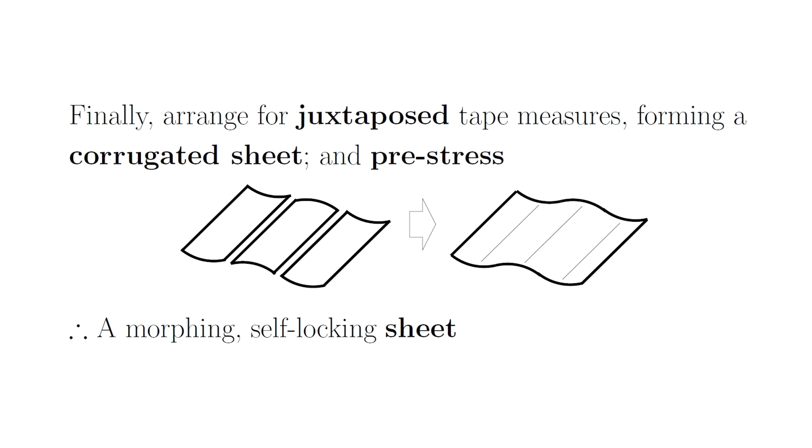And if you take several flick bracelets and imagine orienting them up and down and repeating that pre-stressing process, you get something that looks a bit more like a sheet, a kind of gently corrugated sheet, rather than a sort of wide tape measure. So something that looks a bit like this. I'm not sure you can see the corrugations particularly well. There we go. But this has been pre-stressed in such a way that it too will also roll up into this tube that you can see here.

This is also bistable. I knew this bit was going to involve a little bit of running around. And so that's quite nice, that's quite lovely. And again, it shows the concept being extended to different structural forms that you report on. And this is just what you saw there. It's sort of rolling up. Apologies for the poor lighting there.

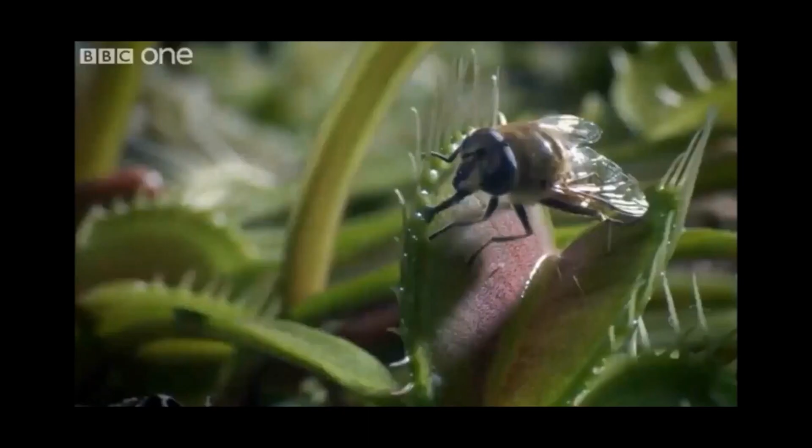And then the final demonstration of this is to do with the Venus flytrap and the operation of that. I'm not going to show the death of a fly on screen. It is the BBC One after all. It's probably going to be reported with impartiality and a lack of political bias. But anyway, oh no, let's get past that.

I do have a model of the flytrap. And here we go again. So here is my Venus flytrap, as you can see here. And I do have a fly specimen here. So the fly, you can see there, that's the fly.

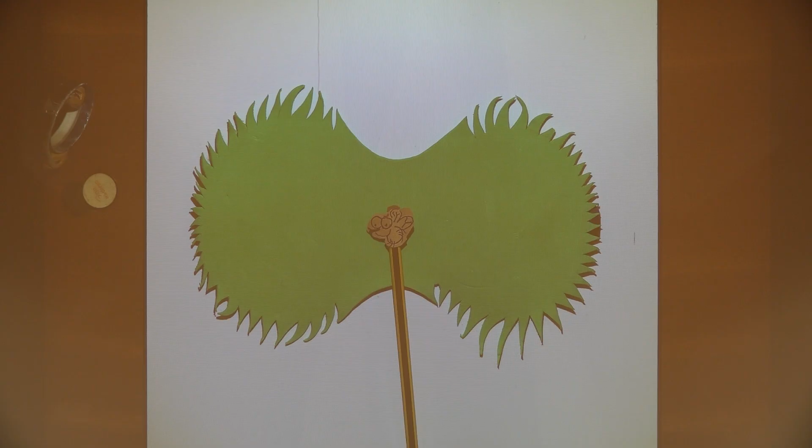So the fly lands in the Venus flytrap. It triggers the movement of a hair. The second time it triggers is when the flytrap activates—it doesn't do it the first time because that could be a false alarm. And there it goes, and the little fly is clearly toast.

Anyway, running to the heart of that is, of course, a flick bracelet. So here you can see it—it's got this sort of tape-like consistency. In the Venus flytrap, that open configuration is equivalent to the straightened configuration of the tape. It's held open by turgor pressure, the fluid inside.

When it senses the presence of the fly, it evacuates some of that fluid. So in the same way that me pushing down on the top creates that reduction in structural depth, the removal of turgor pressure from underneath does the same. Eventually it snaps through like that, and it traps the fly, as you can see.

So this was an interesting problem—I did not solve this, it was solved by other people elsewhere. But this idea that plants could move very fast without muscle is borne out by this interaction between materials being pre-stressed, pre-strained, and having this bistable capability.

Okay, we're near the end now, getting close. Localization, stable propagation of the unstable. If you take a tape measure out of its housing and let go, there's this chaotic dynamic explosion. It wants to be straight, and you see this wonderful interchange between elastic potential energy and kinetic energy.

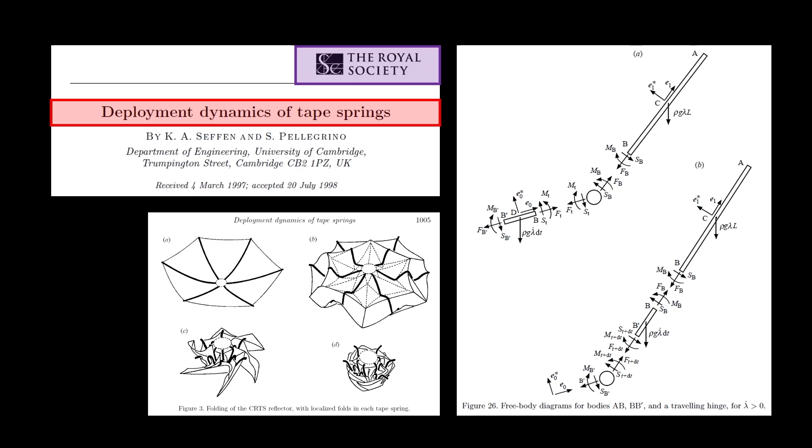And you probably know this—here we go again. If you take a length of tape measure and bend it, it snaps through and you get this unstable behavior. But if I turn that to the side, you'll see it forms this hinge. And that hinge has a remarkable property of having a radius of curving which is constant, and the torque I'm applying to maintain that is also constant.

So you have the unstable feature at the start creating something that ends up having these stable properties—hence the tagline we talked about. These are just some simulations at the bottom confirming that. To reiterate, it has a constant radius of curving, so as you articulate it, it envelops more subtended angle.

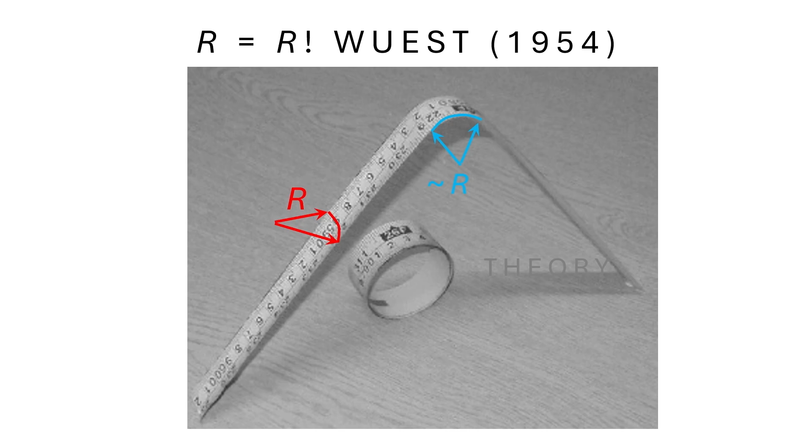And not only that—if you assume the strip has a constant circular arc cross-section, in a wonderful calculation from 1954, Wuest showed that the radius of curving of that hinge was exactly the same, that R equals R. To explain why this might do what it does, we go back to a lecture by Maxwell in 1875 to the British Chemical Society on the elusive van der Waals equation.

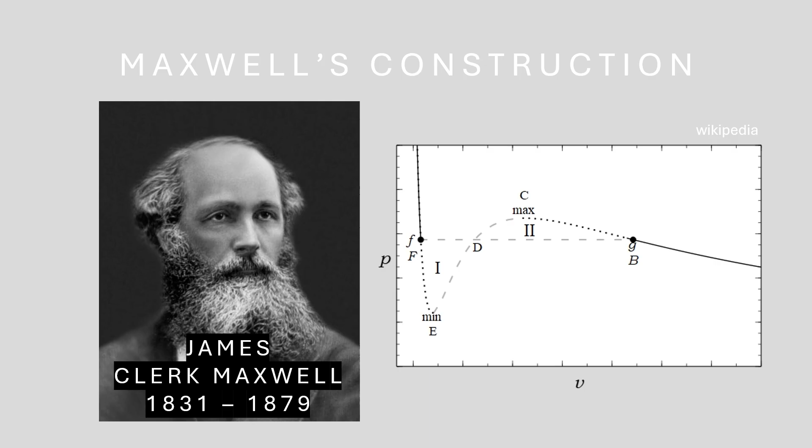Forgive me if I get the description of this wrong, but the van der Waals pressure-volume equation describes the transition between a liquid and gaseous state at constant temperature. You have this oscillation, this propagation of liquid into gas and vice versa, depending on whether you're heating or cooling the system.

It's elusive because you don't really see that in practice, but what you see in practice is that interchange taking place at constant pressure, P star, a propagation pressure where the states move in and out of each other. Maxwell said, well, if you can find a line you can draw horizontally to give you three intersection points where the area above and below are equal, that is your constant pressure.

And so we thought, well, could we deploy this explanation, the Maxwell construction, as it is known, for describing what's going on with our tape measure? Why does it form this particular sort of hinge behaving as it does? And you can imagine the hinge a bit like the gaseous state, highly agitated, very curved, and the straight bit's a bit like the liquid. So you have your two-phase description.

So you need then to describe the bending of this. So you need a theoretical description of that. We take a strip, we bend it by moments, these torques at either end. You figure out what the curvature is. The curvature kappa bar on the right is measured against the radius of curving to start with. These are not insurmountable problems. You can solve for the moment curvature response, and you get something which is highly nonlinear. Looks a bit like this.

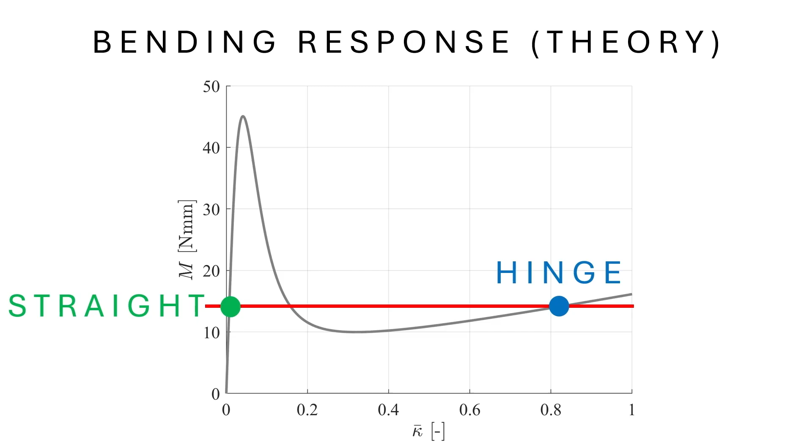You can draw a straight line across, 3 points, first and third describe the original straight state, slightly curved, but very imperceptibly so. And then the hinge, the more highly curved bit, setting the areas above and below equal. You then get this curvature here, kappa bar star, almost equal to 1, but not quite, because Wüst assumed that the thickness of the material was very, very small indeed.

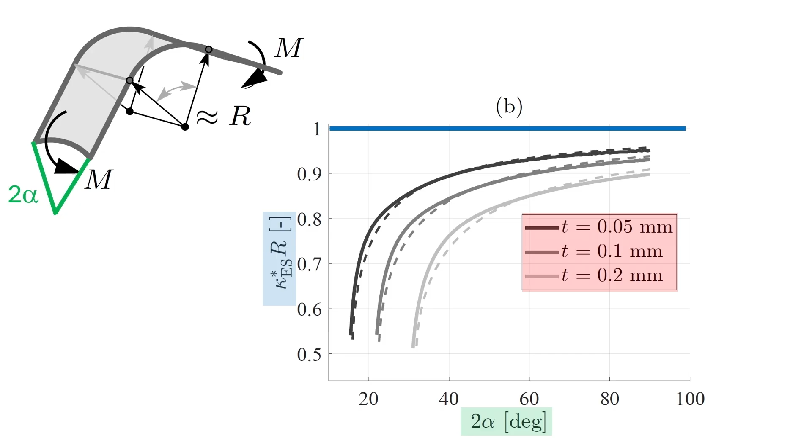If you allow for some realistic thicknesses, and you change the angle that is swept by the cross-section, then you get these traces from that construction that begin to approach unity, but not quite, but nevertheless give some kind of credibility to this method as a viable way of explaining what's going on with these hinges.

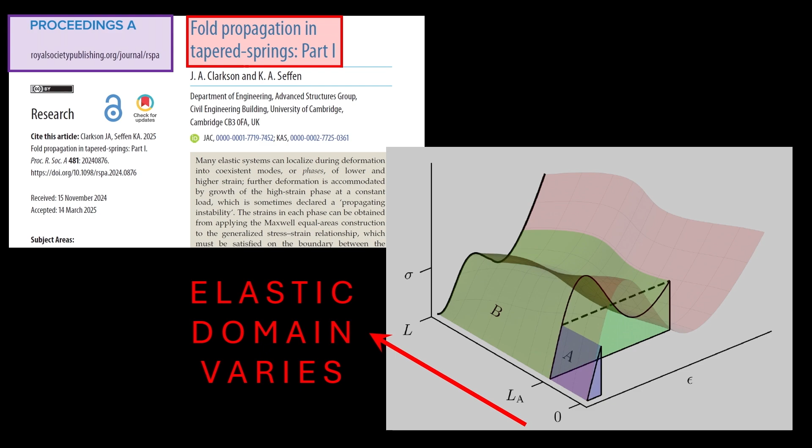And what you can do, even more interesting, is you can amplify once more the parameterization associated with this. That is to say, if you have a tape measure like this where every cross-section is the same, the elastic domain is thus constant. But if you allow it to have some variation, you can see the width changing here, then the elastic properties are changing. That is what I mean by the elastic domain varying.

And the short outcome of this with regard to the Maxwell construction is that, yes, you get the second phase forming, but the properties of that phase will depend on the level of deformation that you impart to this. So if I bend this, and thanks to Jamie Clarkson, the PhD student who worked on this and figured it out, you'll see it forms a fold here. I'm just trying to get the orientation right.

But as I increase the rotation, you'll see it jump into a second phase that has a different set of properties. And you could go back and repeat, and it does it again, jump, and there it goes. So again, a vindication of the credibility of this method in terms of its application in a mechanical context. So that's the tape spring.

Now the last and final section, confinement, if I have time, 2 minutes. Is that all right? Hierarchical buckling. Right, I need to go back again.

So I've got here a little foil cone. I make this by just taking some mylar, cutting a wedge out of it, putting some sellotape on there, creating a little cone, and now what I'm going to do is force it into a position it doesn't want to be in. I'm going to squash it, and I get this lovely fingerprint formation taking place there.

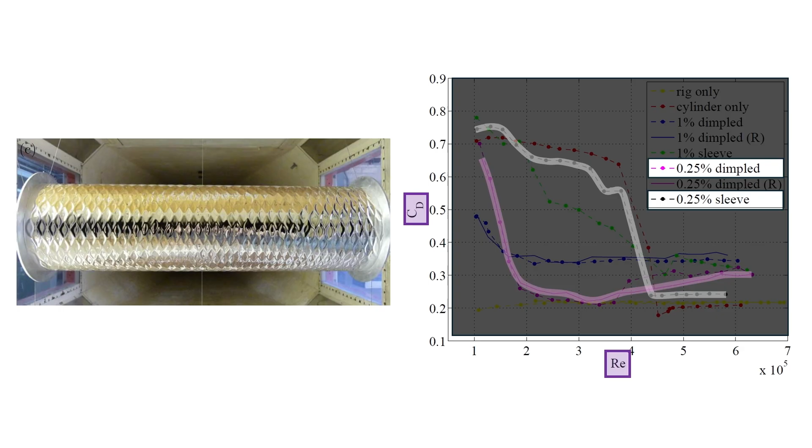So you can imagine perhaps your car or vehicle having this sort of surface that you could switch on and off to lower the drag force to achieve better fuel economy. Of course, I'm not an aerospace engineer as such. I'm not an aerodynamics person, aeronautics person, but this sort of thing could be quite fun. We've got to be careful that we don't repeat what we do.

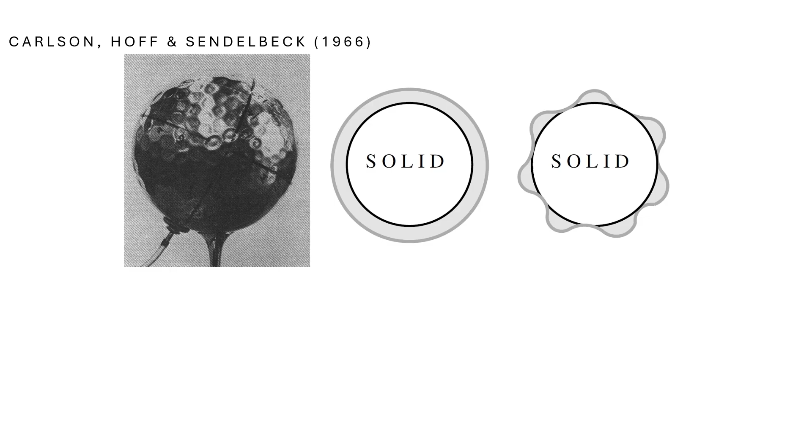Nicholas Hoff did an experiment in 1966. He created these very thin metallic spheres that were impressed onto these solid cores. There was a bit of an air gap, I should say, between them, and he then evacuated the air, forcing the contraction of the sphere onto the solid core, a bit like you saw with the cylinder, and produced this dimple pattern that you see.

If you imagine, instead of working with solid objects, things that are elastic, with an elastic film, and the two things grow together, but the film grows much more quickly, it's kind of confined, it becomes contracted onto the surface. And imagine that you can work with rugby ball shapes instead of spheres. Then you get this in simulation, and this is not my work, this is Chen and Yin from 15 years ago, but you get this whole morphology associated with fruit and veg, if you like, which is quite impressive. The thing about this, a lot of this is numerically driven. It's all done by simulation.

So we wanted to try, and this is the last thing to show you, to make this work in practice. What I've got here is just polymer that you cast, and then it settles as this sort of rubber shape. And on this side here, I've got some other polymer that you spray onto this, and it cures as well, and you've got that configuration. If you imagine casting the white, then stretching it, and this is why the holes are there, and then spraying onto that the red. So the red is then sprayed onto that, not knowing that the underneath is stretched, and you let that cure, and then you let it contract.

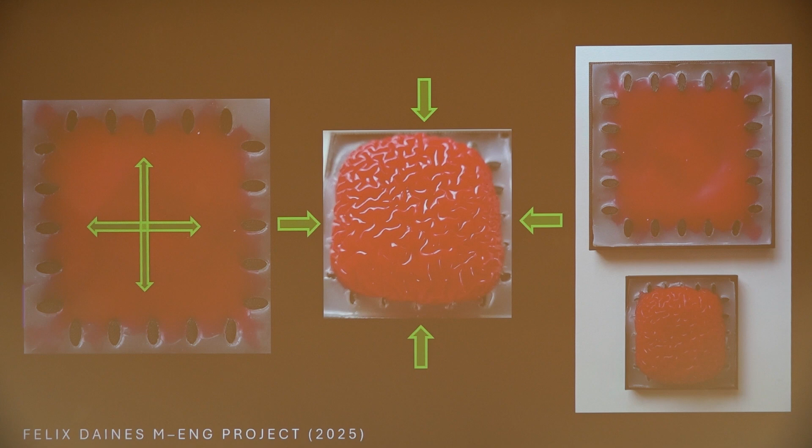So what happens is that the red is now contracted, but it has this interaction with the underlying white. You get something that looks like this. You get a brain, okay? You get something that looks like a brain. You basically can show that these sort of principles run to the heart of the kind of evolution of structure in biology and so on.

Okay, so keep your topic relevant. We live, as I say, in an age of fast-moving stuff. It's up to us to keep our subjects alive. Write a textbook. Remember, early books are brilliant because they didn't have computers helping them to solve very hard problems. Amplify parameterization. This is what we do all the time. We find compact models of simple demonstrators and then allow that to push us in the direction of things that are interesting. And remember, it's all about scholarly endeavor, and I wouldn't have been able to do half the stuff I have done without the brilliant collaboration with these postgraduate scholars over the years.

I should acknowledge Chris Calladine. He was responsible, along with Sergio Pellegrino 25 years ago, for getting the job that I have now, probably. Chris was the outgoing head of structures at the time. He saw structural mechanics bigger than structural engineering, literally wrote a book on it, and he sadly died a couple of months ago.

And finally, to Mum and Dad, I was their firstborn kid. They were young parents, working class, Northern Ireland, time of the Troubles. I had more ginger hair than everybody in the village, and yet they fostered my academic leanings without any judgment, despite themselves having to leave school early and go out to work and so on. They're still with us, by the way. And so I should acknowledge them properly for that.